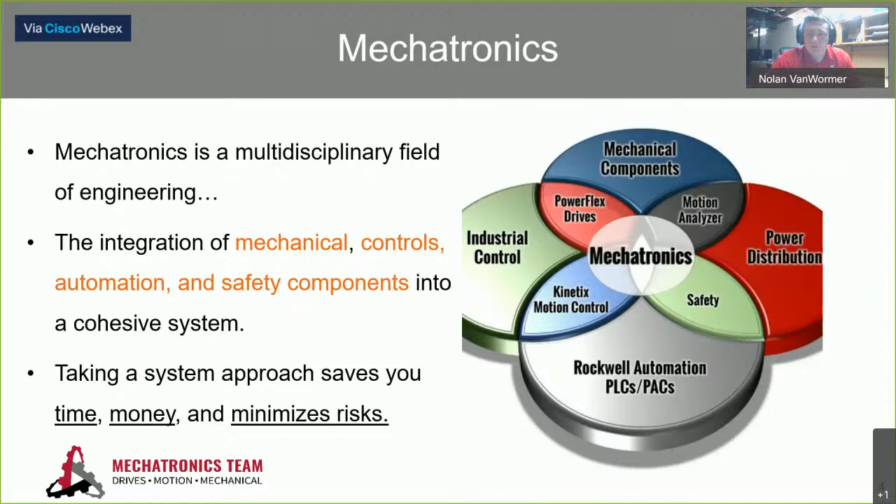So let's get started. So we'll go through what is mechatronics, why to use it, application considerations. We'll go through an example, and then we'll use the Rockwell Automation sizing tool Motion Analyzer to go through a full system. So jump right in. What is mechatronics? You can see on the screen there. Big long word. Basically, it's bringing the mechanical department and the controls department together for the benefit of your machine safety, function, save you time, save you money, and reduce your risk from the machine perspective as well as safety perspective.

So typically what we see is the mechanical department takes their application data, whatever the load is, whatever the cycle time is, starts picking out some mechanical components that look right in the design, that have a good enough safety factor, maybe consider life, maybe not. Pick some gearing to make an inertia match, or maybe not, and pick a motor. And then a few weeks later, once the design comes along, the controls guys get kicked off, they pick out a PLC, some safety components, start designing a panel, and drop a drive in. And then we hope that that drive and that motor work together for a functioning system.

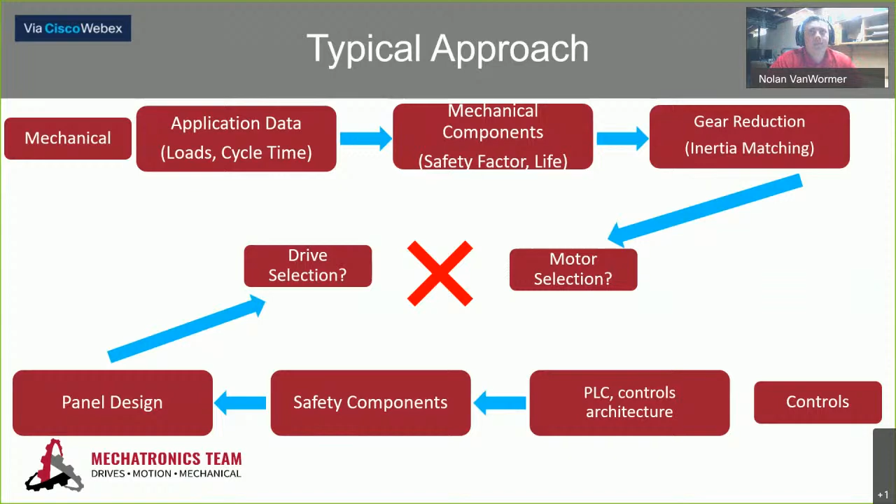So the mechatronics approach takes that a little bit differently, and we get the mechanical team and the controls team together from the start. We look at the application, what's the load, what's the cycle time, how do we optimize that, look at safety factor, look at safety of the system, make sure we have a good inertia match, that we have the latest PLC, the right drive and motor optimized for whatever you're going for. Do you need washdown rated? Do you need safety? Are you trying to reduce costs, reduce weight, whatever it may be? We look at it as a whole system, mechanical and controls together. That's really what mechatronics is all about.

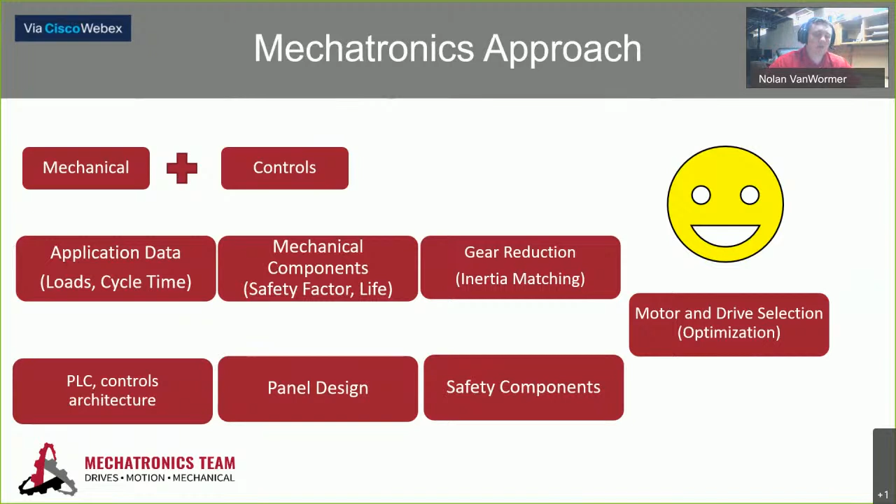So why use it? So with more and more competition for you and your customers going after the same kind of machines, you want to make sure that whatever you're offering has the most features or is the most cost competitive, or whatever it is your selling point. And everyone's trying to build machines faster.

Designs changing after products have been ordered. Something got heavier and you need to make a change to the structure. You need more linear rail or more of some component or different size of something. All things we want to avoid if we can up front, or knowing that when that design change does come, that you can make the change of product easily, know what the limits of your system are.

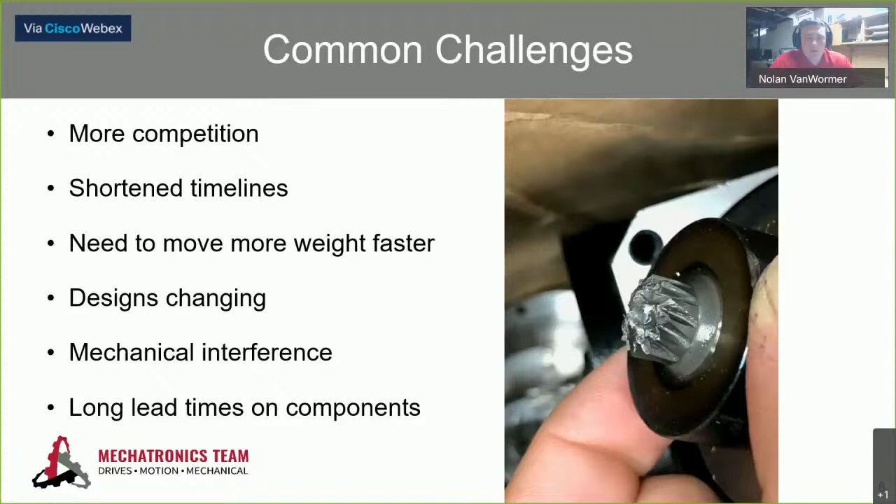And then as things change, sometimes boxes don't fit anymore and you got to make adjustments. And having a system up front where you know what the limits are and how big everything is and what you have to work with makes making those changes a whole lot easier. And especially with everything going on in the world right now, lead times can be all over the place. And with our team, we can look at changing various components, working with our long list of different vendors to get you the right product in the right amount of time.

So some more benefits of Mechatronics, relying on engineering resources at McNaughton-McKay. We have a whole team of people dedicated to looking at the mechanical system and the control system together as one. We can offer CAD models. We know what the system limits are. A little bit later, we'll get into a report we can offer that shows you, based on what you tell us for speeds and loads and your environment, what the speed limits are, what the torque limits are, what you should set in the PLC.

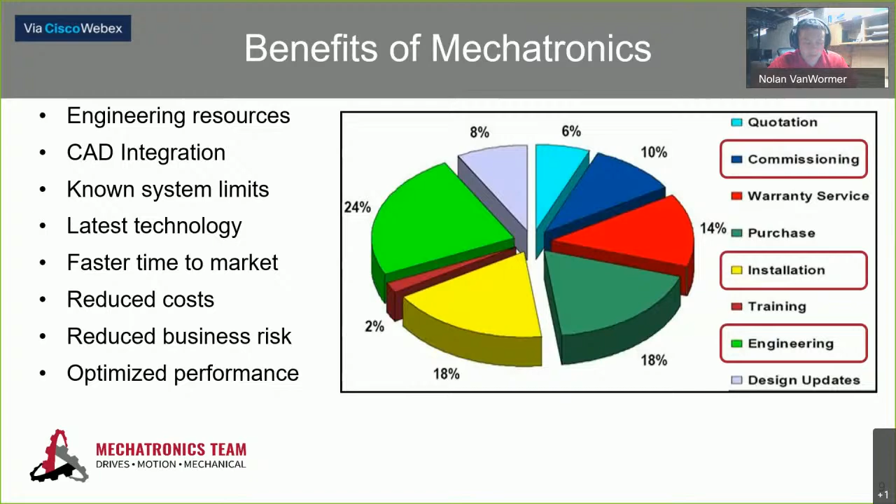We're up on the latest technology to offer you advanced safety features. We can help you get to market faster, speeding up your design, providing you CAD models and recommendations on product. And we can reduce cost by optimizing the system as a whole. And we'll get into an example showing how much cost we can really take out of a system.

So we talked a little bit about optimizing at the beginning. What does optimizing mean? It can really mean a whole bunch of different things. It can be optimized for size. You're limited in some package of something you're trying to replace, or the whole tool needs to be small. It can be optimized for cost. Everyone's always trying to take money out of their job, put more money into your pocket.

Nolan, I think we lost your audio there. Bear with us, folks. I think we've lost our audio. I apologize, everyone. Give me just a second. I'm going to try to reach Nolan. I think our audio has cut out and he's unable to hear me as well. So give us just a second and we'll get back online here. I hear something. Are you back? I'm back now. Okay. Great. I think we missed a few of those bullet points there. So if you can back up just a little bit for us.

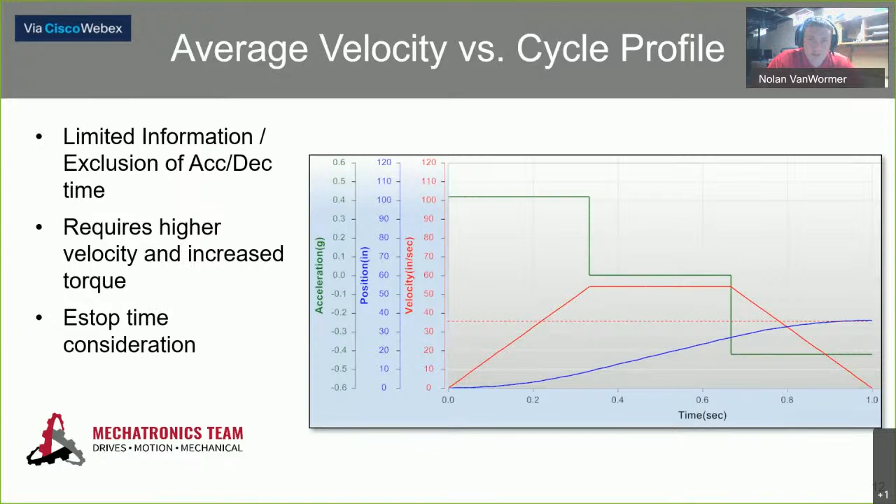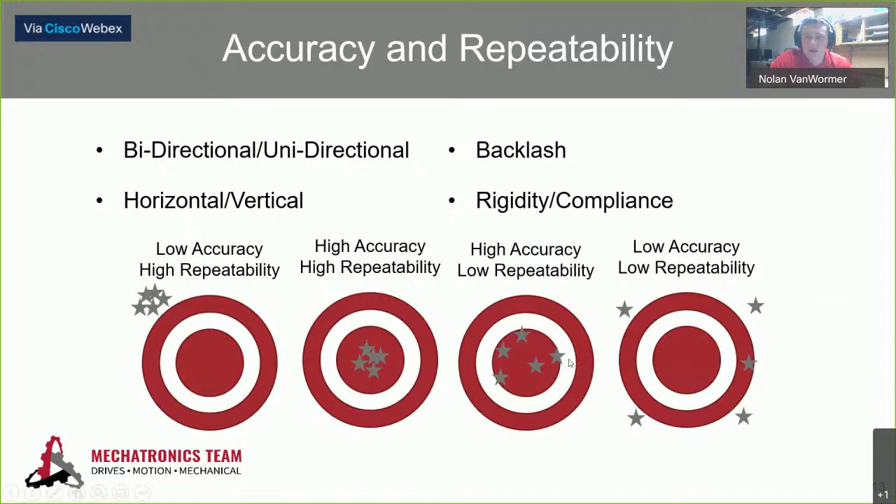Getting to that high accuracy, high repeatability often comes with more costs, whereas a repeatable system that might not be as accurate that you can tune in with your adjustments on the control side can save you some money in your gearbox and other components. And then we have some other applications where I don't need to be terribly accurate or terribly repeatable. We can go with a much lower cost system. So just understanding the difference between accuracy and repeatability goes a long way in optimizing cost and other components.

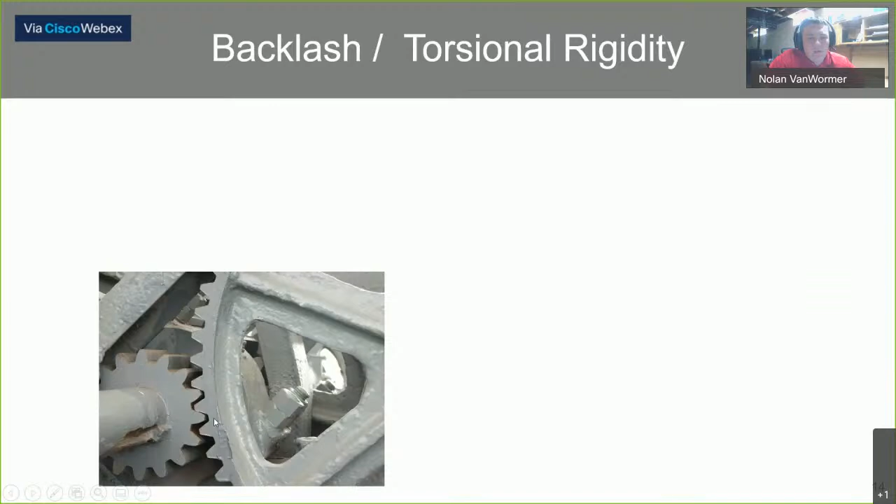So talking about backlash. So you see here, backlash is this gap between these two teeth here, where as you change direction, there's some lost motion. So if we look at a low-cost economy gearbox, it's going to have the backlash shown there. You have a couple arc minutes, and then an elastomer coupling can have a lot of squish within the spider insert. So that can end up being a 1/2 degree at full load of a particular gearbox, which can be quite a bit of motion.

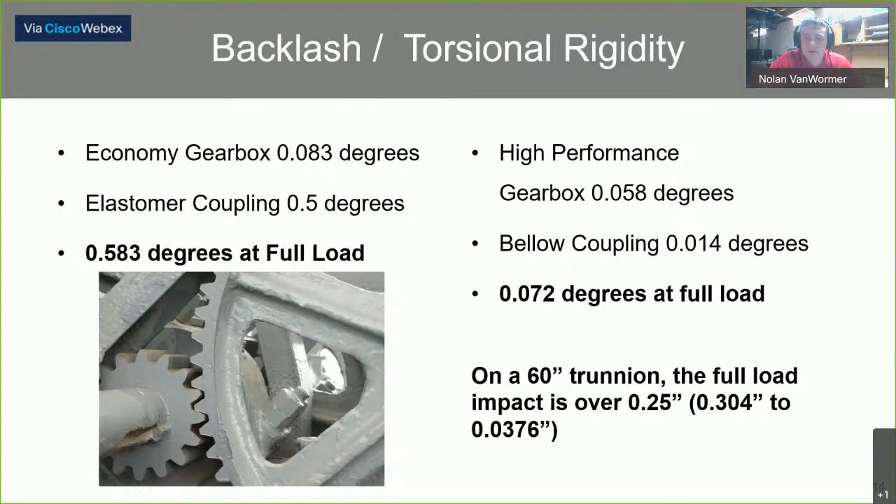So if we want to look at something that's a little more rigid, you get a high performance gearbox that has a bellows coupling, so there's no rubber inside to flex, it's solid metal. We can take that whole 1/2 degree out and we're left with fractions of a degree. And you can end up with a 1/4 inch of lost motion on a 60-inch trunnion at full load, which can be a huge amount of error build up. So if you have trunnions and those types of products, you want to make sure that you're picking out the right gearing that's going to give you optimized performance for your system.

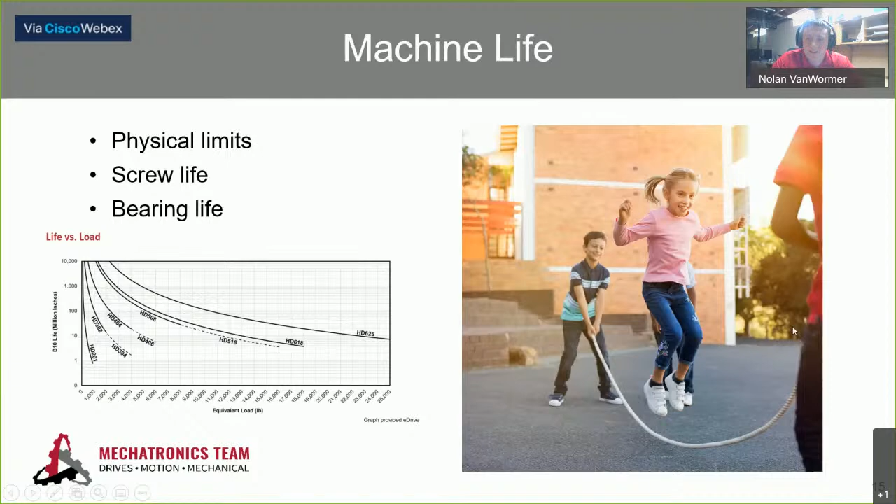So you want to make sure you're aware of what the critical speed is if you're using a screw type product, so you avoid your screw looking like that jump rope and damaging your product. Other things to consider is the efficiency or friction of whatever product you're using.

But on the flip side, if you have a vertical load, a ball screw is much more likely to backdrive under its own load, so your load will drift down. Whereas in a machine screw, you might want that inefficiency. So it's finding that balance of where you need efficiency and where you don't to achieve performance of your machine.

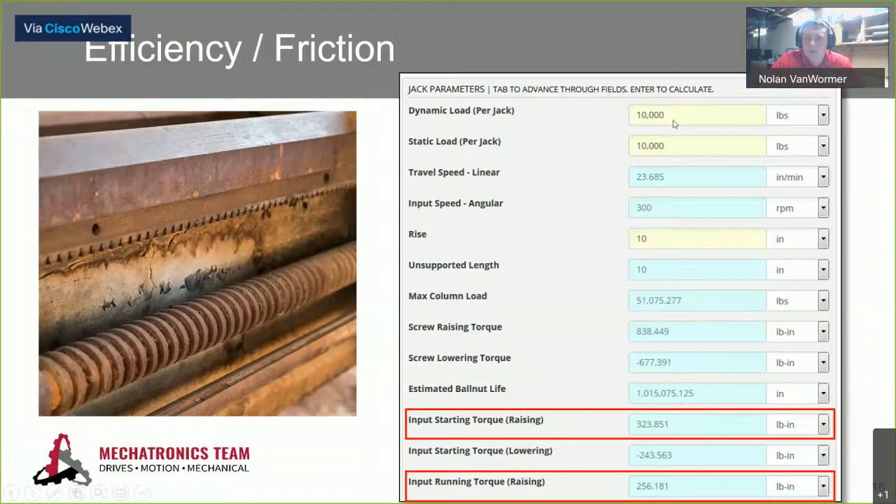So let's take a look at some things we look at and how we collect data. When we do a sizing, our drives motion mechanical team, we look at what the load is, what your move profile is, how often you're cycling, any other specifications for your actuator. Do you want a rod style actuator? Are you looking for a belt? Are you looking for a rack and pinion?

Do you have a similar machine? What type of drive and motor family are you looking for? Do you want the latest and greatest technology? Do you have a huge install base of legacy equipment you want to try and stay within? Is there a safety factor you're looking for? Is it 2 or 3x, or are you doing an aerospace type application, 5x, something critical? So all those things, we collect them within our application data sheet.

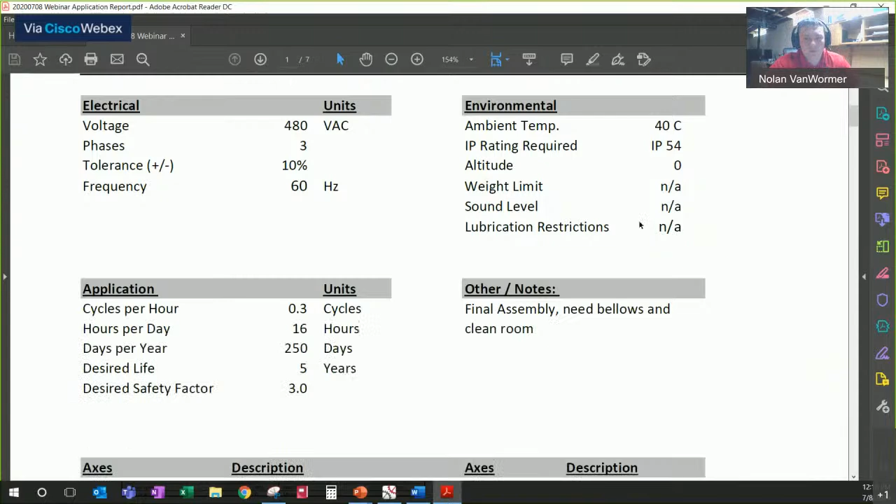And then we have a report, which I can pull up now. So once we collect all that information, we go through all of our sizing. We can provide you a report that looks like this. It's got your information, whoever worked on it, when we worked on it, what your job number is, so you can put it within your job file. We tell you what voltages we assumed, what environment we're assuming. We have all the application data for life. We have spots for notes there for you.

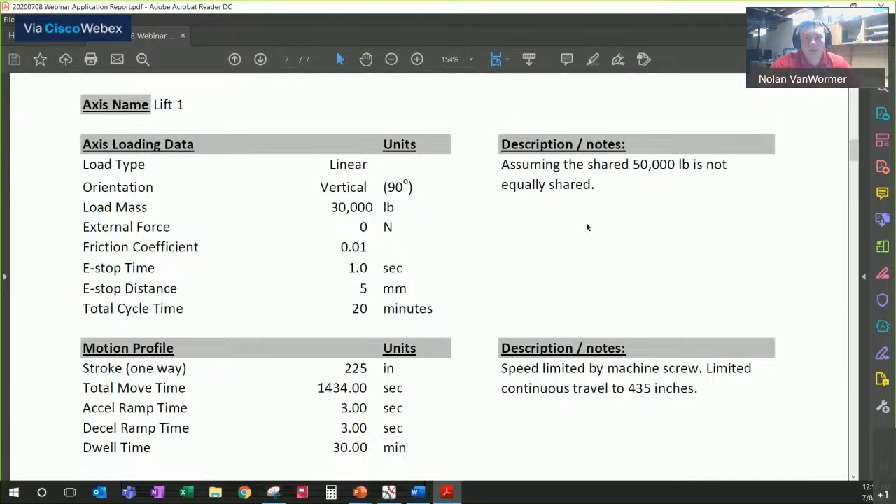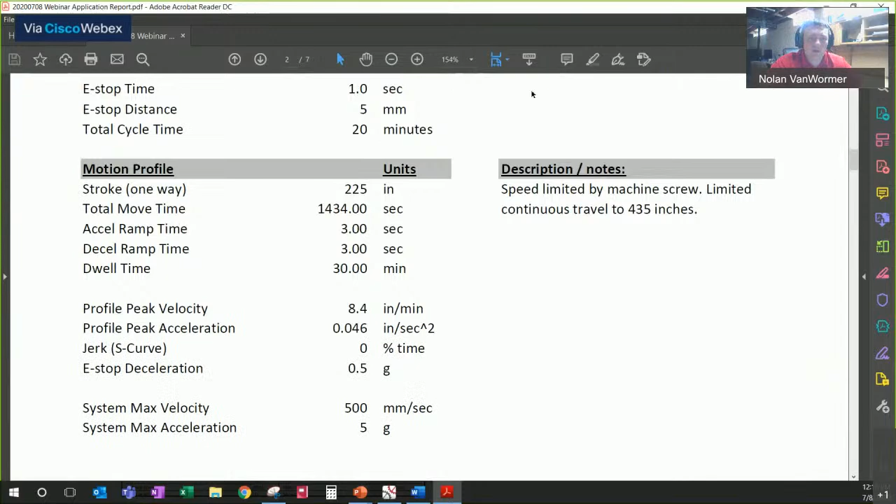And for each individual axis, we have all the notes of what load we sized to, what e-stop time we allowed for, what the total cycle time is, some notes on what the motion profile is, and show you a little picture of what we get out of the sizing software. You know what repeatability and accuracy you should be expecting.

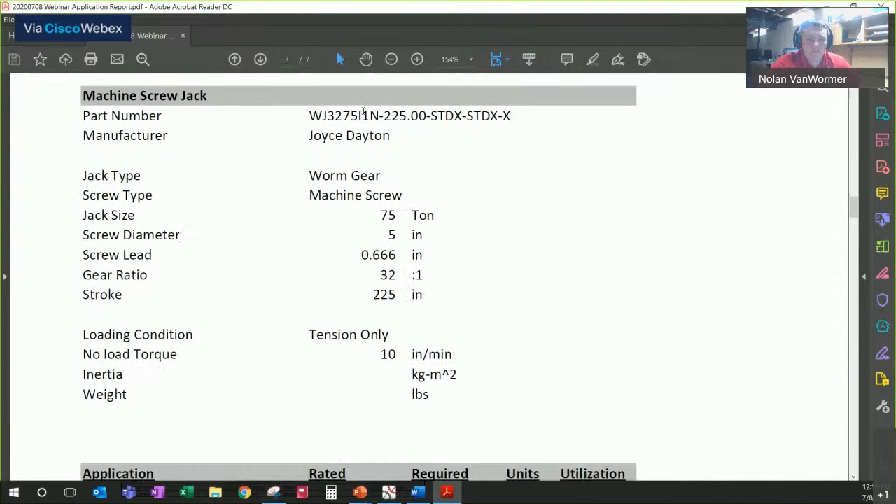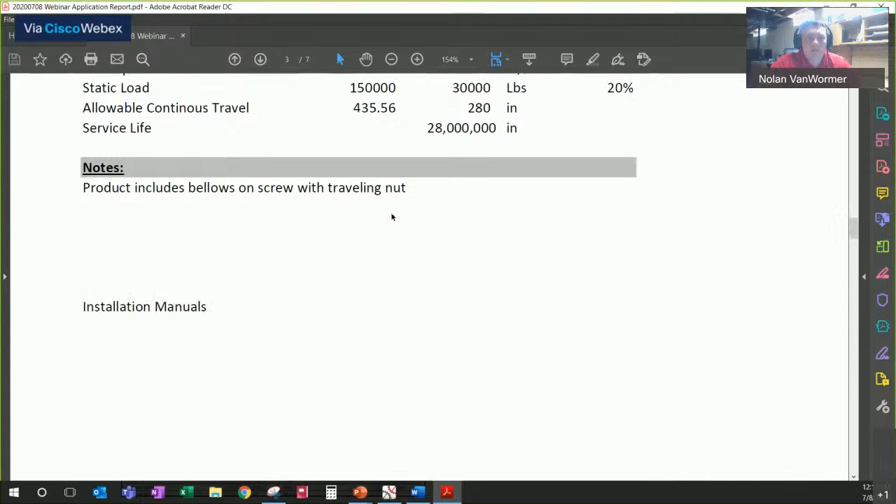And then we'll give you all the information on the products that we help select, how it's loaded, what it's rated for, give you a utilization percentage to know how oversized it is, if you need to speed things up. If there's installation manuals available, we'll attach those in the report here, give you maintenance manuals so you know how often to lubricate and how to take care of your machine.

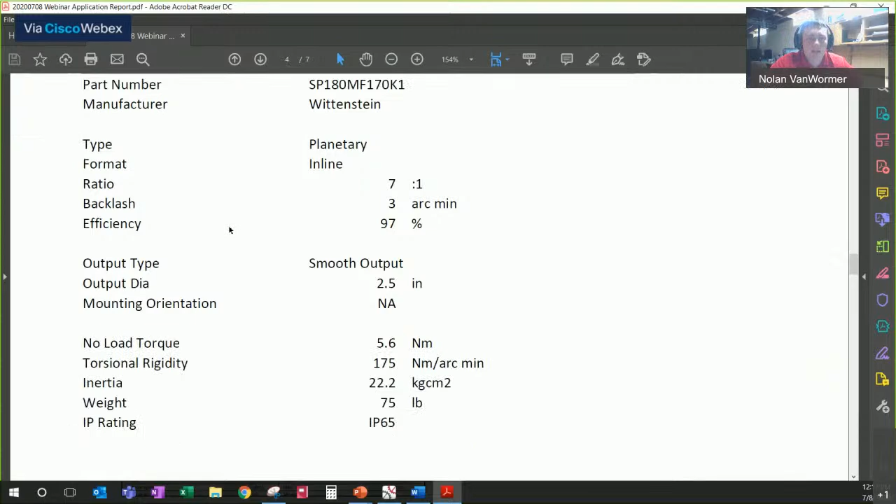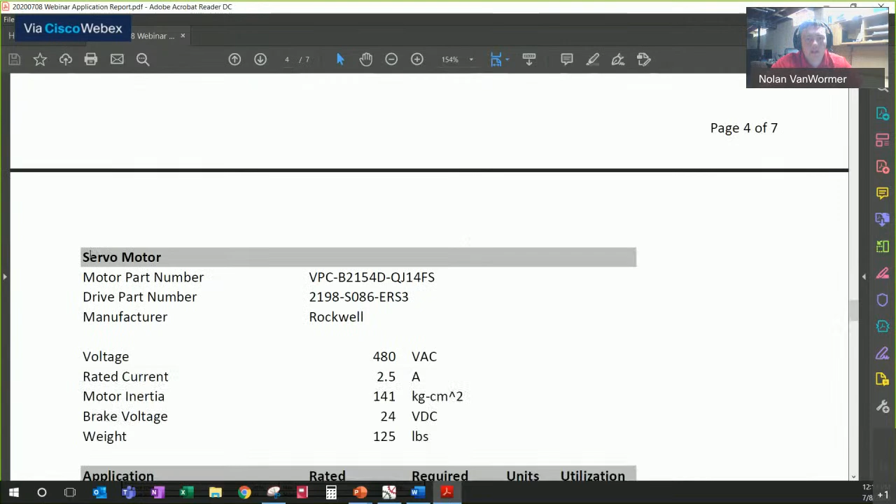Same thing there for a gearbox, how much of the speed are we using, how much of the torque are we using, notes that this particular gearbox is lubed for life, give you information on the Rockwell motor we select for your particular application, what it's rated for, how much it weighs. Other important notes like the VPC motor has a 230 volt fan that you're going to need to plan for.

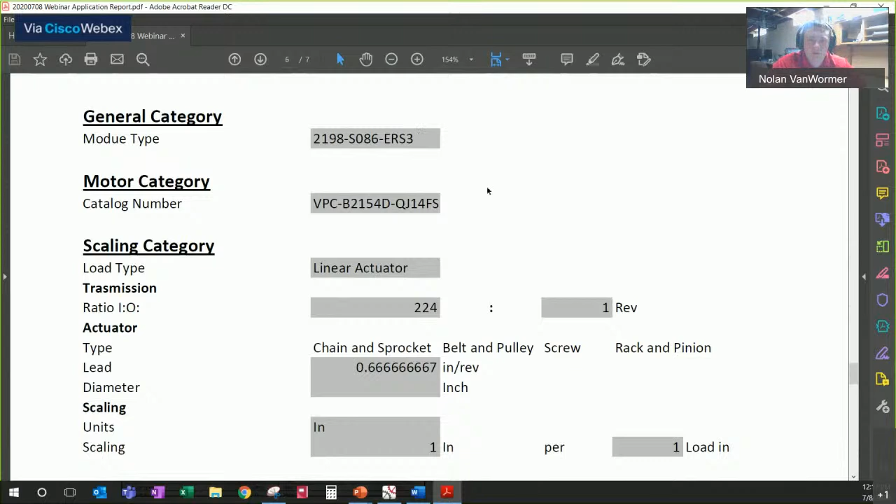And then to help out the controls folks that are on the call, once you get to the programming side of things, it'd be really helpful if you knew what the mechanical team picked out and how that impacts your controls. So we set up a chart here that'll walk you through your motion axis configuration. You put in your drive, your motor, here's all the scaling information. So there's no guessing or having to go ask, go look it up. It'll be right there for you.

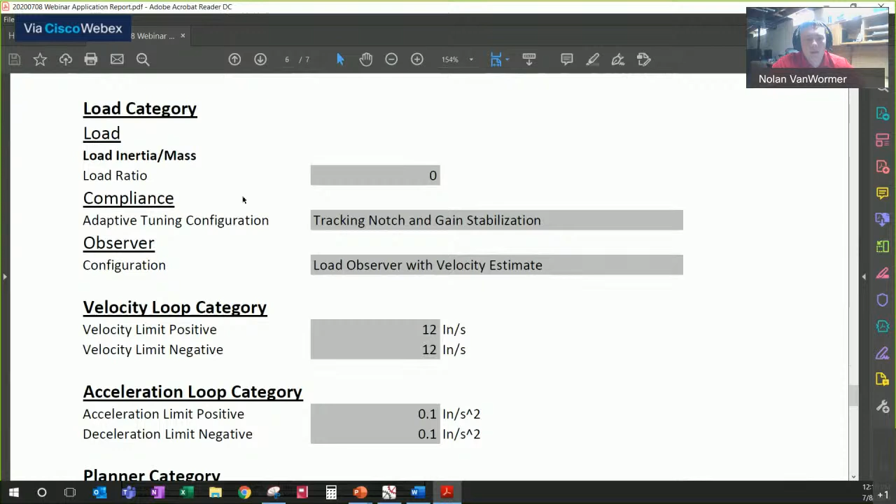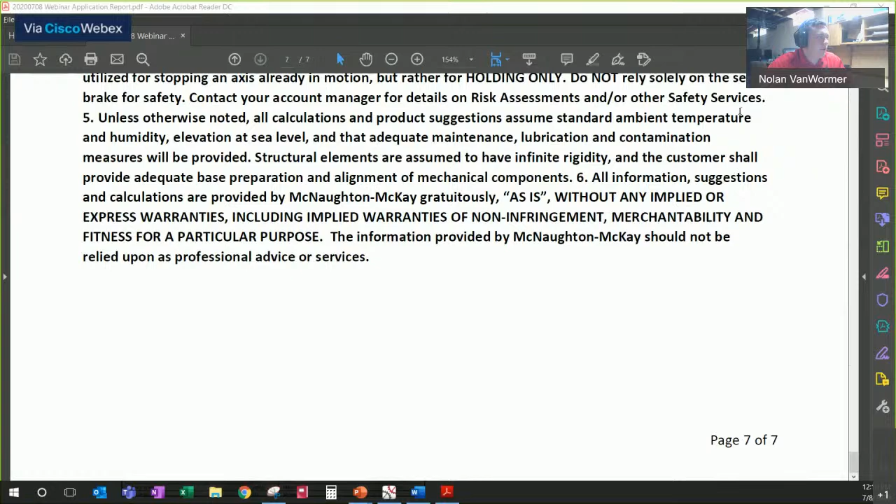How to set up auto tuning, all your loops, position limits, acceleration limits, velocity limits, all those things. And then our legal disclaimer there at the end. So we'll jump back into the PowerPoint here. So that's kind of our process. We collect all that data from you and then report back what we sized to and what everything looks like.

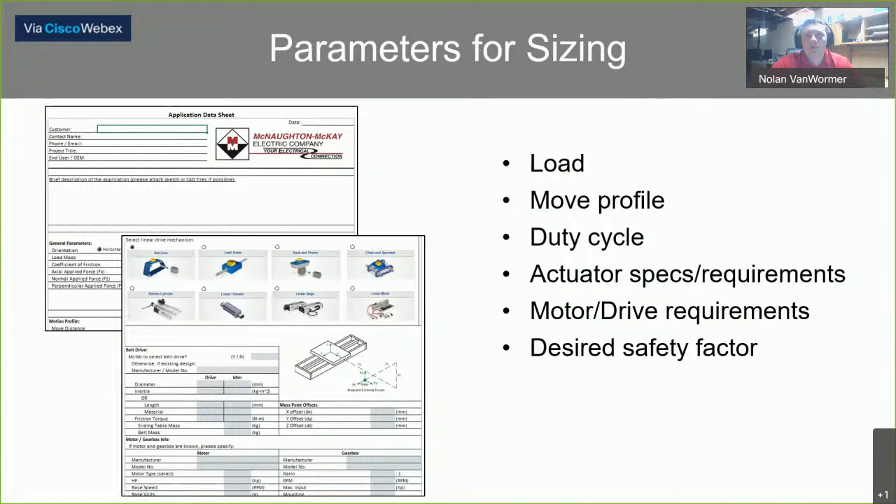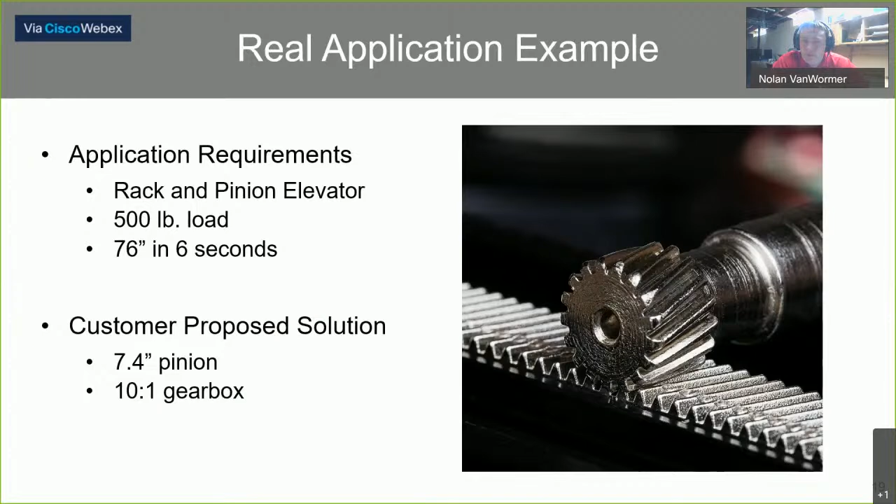So what does that look like for a system that we've done for a customer? A while back, I did this application. We had an elevator. It was a dual rack and pinion drive. We were lifting 500 pounds, 76 inches in 6 seconds. The customer already had designed in a 10-to-1 gearbox and a 7.4-inch pinion. So we went through, did a sizing, and then I asked, do you mind if I play around with that ratio and that pinion a little bit to try and optimize the system?

We'll take a look at what the customer originally came up with. So we ended up with a 165 millimeter frame VPL motor with the biggest Kinetix 5500 drive available. And that gearbox that they had picked out, at 10-to-1, we were actually exceeding the RMS torque. So the continuous torque of that gearbox, we were exceeding based on the duty cycle they were running.

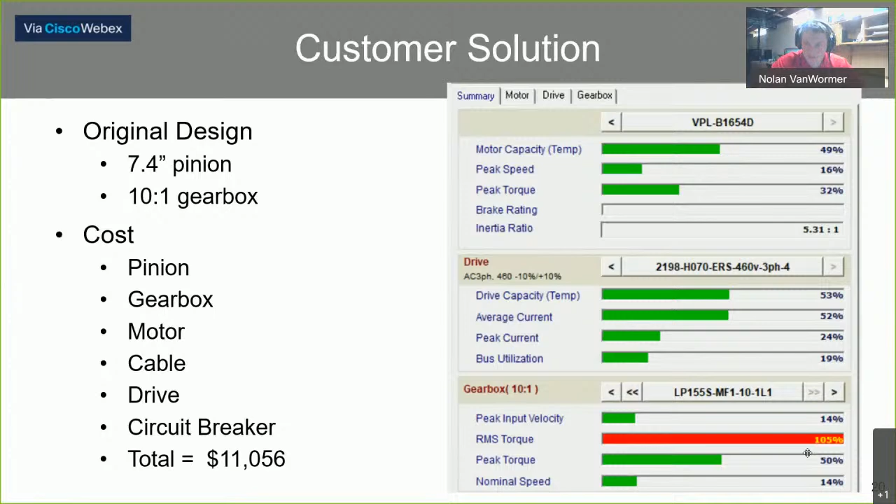Look at that total system add up, because we're looking at the whole system. It's more than just the motor and gearbox. It's motor, gearbox, drive, motor cables, circuit breakers, everything that goes in the panel. Total cost, looking at about 11 grand for that solution. So if we optimize it and we go to a smaller pinion and put more ratio into the gearbox, we're able to get that system down to about $7,000, taking 37% of the cost out.

We end up with a better inertia ratio match. You'll have an easier time tuning the system. It'll be more responsive. It'll perform better. We were able to drop down to a 100 millimeter frame. That's dropping 3 motor sizes. We dropped 2 or 3 drive sizes. The gearbox actually did get smaller because we need less torque with a smaller pinion. So the whole system becomes more efficient from a power usage perspective, as well as we're not overloading any one component. So the system overall performs better and costs less.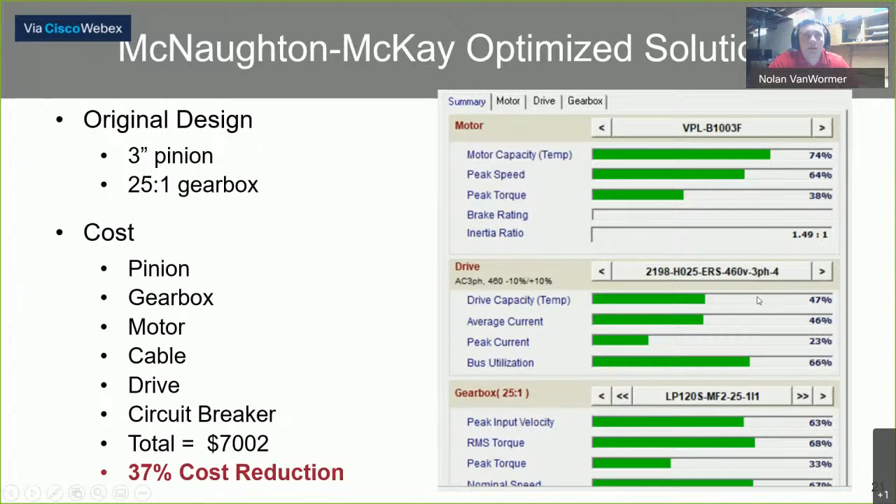So now we'll jump into what a Motion Analyzer system looks like, which is where this screenshot came from here. So some of the features before we get right into the software. You have a lot of flexibility in units. So if your mass you have in pounds, but your stroke's in millimeters, software doesn't care. There's drop downs for all that stuff. We can size VFDs or we can size servos. The profile you import, you can actually export to the PLC. So if you have a complicated move profile, you can export that as a CAM table and import it right into the PLC.

You see performance of each of your components, not just the Rockwell components, but also some of the Encompass partner products. We can look at what your energy consumption is to be able to compare different solutions for total power draw, so what it's going to cost in the long term for the end user. You can play with different gear ratios and a lot of different things to try and optimize the system for you. So let's take a look at a sample application here.

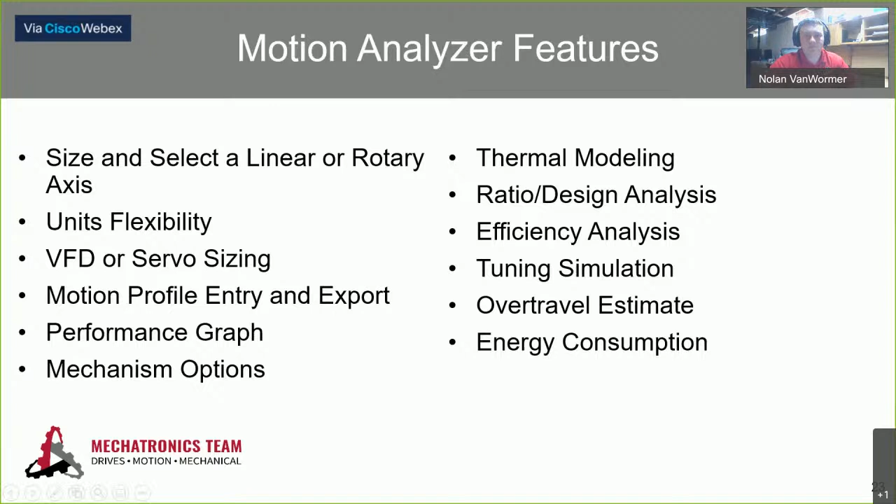So we'll take a 500-pound load. We're going to move it 24 inches in 3 seconds. We're going to do horizontal. And so we're going to put it on some profile rails. And we're going to press and hold 2,500 pounds for 10 seconds. We'll retract in 3 seconds and dwell for 5. Really want to make sure it's as small as possible and as cost effective as we can get. So we'll probably go with a screw type actuator for something like that. Keep the package small.

So you first launch your Motion Analyzer software here. We'll go in, we're going to size and select rather than just looking for pricing on something where you want to put a bill of material together. So we said we're going to go with a linear load. So we'll pick the linear load tab there. We'll go ahead and put in our load mass in pounds. We had 500 pounds. And important thing to note, a positive force opposes positive motion. We see that in our picture here. We'll be a little conservative with our linear rails and say we have a 0.1 coefficient of friction on that horizontal surface.

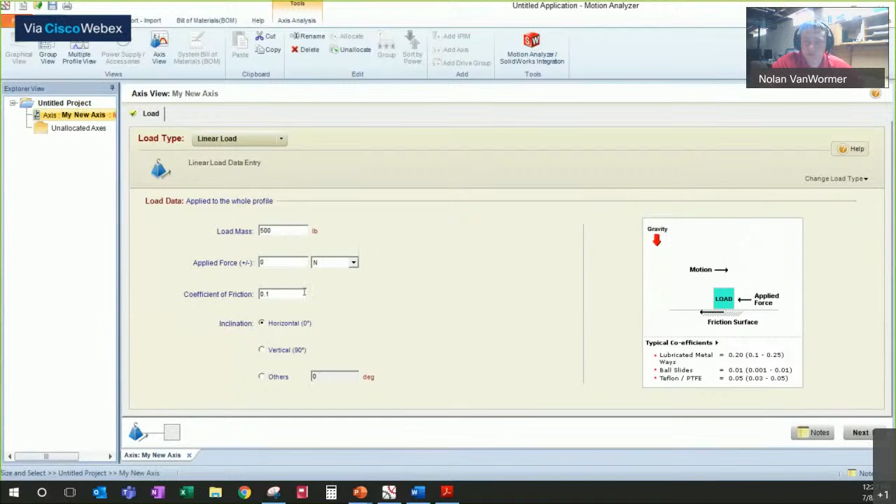So then we're not going to put our applied force in here because it's not always on the load. We'll add that in our motion profile because it's only on certain parts of the segments. If you just have a basic, I need to make one trapezoidal move and then dwell, you can use this. Otherwise, we'll click more options to give you a more extensive profile editor. We'll go ahead and delete that, and we will add an index here. So we're going to move 24 inches in 3 seconds.

Okay, and then once we get there, we have a couple options. We can leave it as a typical 1/3 trapezoidal move with a 1 second accel. If we want to change that, we can change to a trapezoidal move. And then we have control over our accel rate. If we want to take a longer accel or we want to bring it down to somewhere in the 1/2 second accel range, we can take a look at that. And then we'll add a dwell. So this is where we're going to hold for 10 seconds. We'll press and hold for 10. And here's where we're going to put in our 2,500 pounds of force.

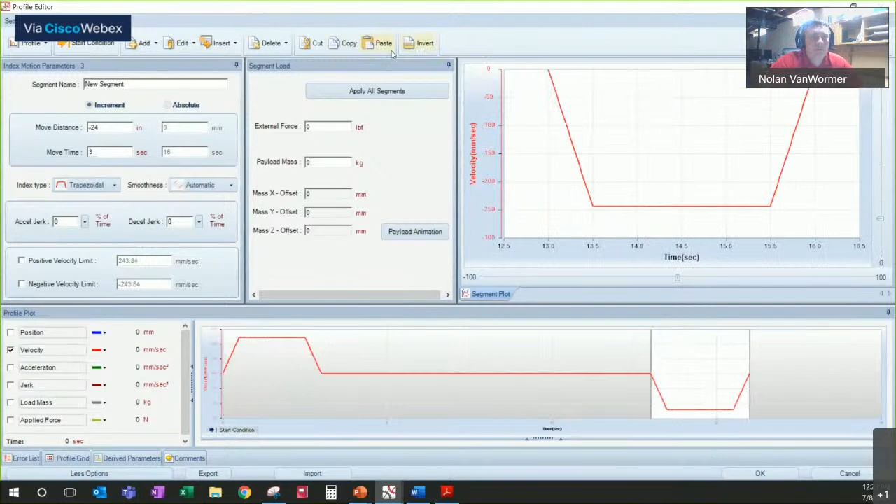And then we need to retract. So we'll add an index. And we can actually copy this one. Go back to that one we just added, paste it, and flip it. So now we've retracted, and we said we had a 5-second dwell. So we'll put in our 5-second dwell.

And you can see what the position graph looks like. We went up, we cruised, and we came back down, and we're waiting in our retract position. You can look at the acceleration graph. So if in our graph we want to add some S-curve to make our whole move look a little smoother, maybe get rid of some of the jitter in the extended and retracted positions as we're coming into final position, we can put something like a 30% accel jerk, and you see that ramps our acceleration up and down.

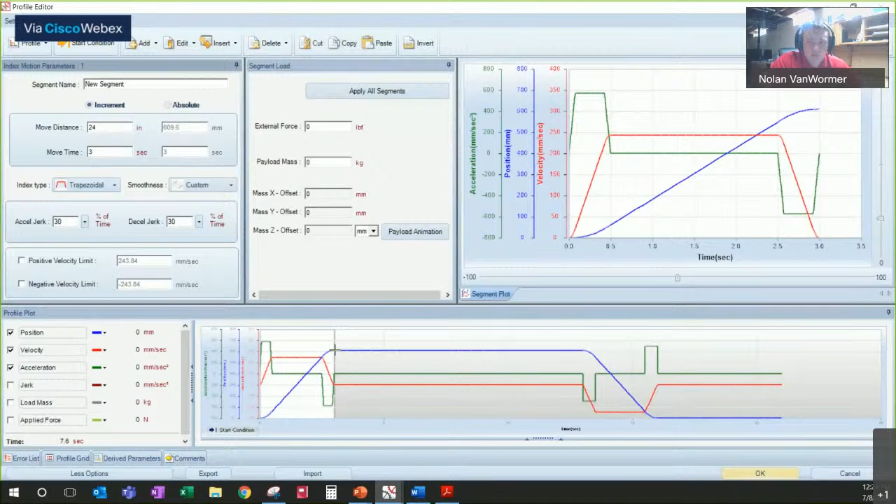So when you're first starting and you're breaking away all that stiction, you're actually ramping your acceleration up. Makes it a whole lot easier on the mechanics, and we'll do the same thing on our way down. So we see here, we are ramping the acceleration up, and we're ramping the decel up and down. So we'll leave one S-curve, and we'll leave one without. So that's what our profile looks like.

So we'll move over into picking out our mechanism. So we said we're going to go with a ball screw style actuator. So we'll start with... went ahead and pulled some specs from one of our vendors. So our lead is going to be a 1/2-inch lead on this. I already have the inertia here. It's in pound inches squared. Go ahead and grab that. And we're going to assume a total efficiency of 90% for that particular actuator.

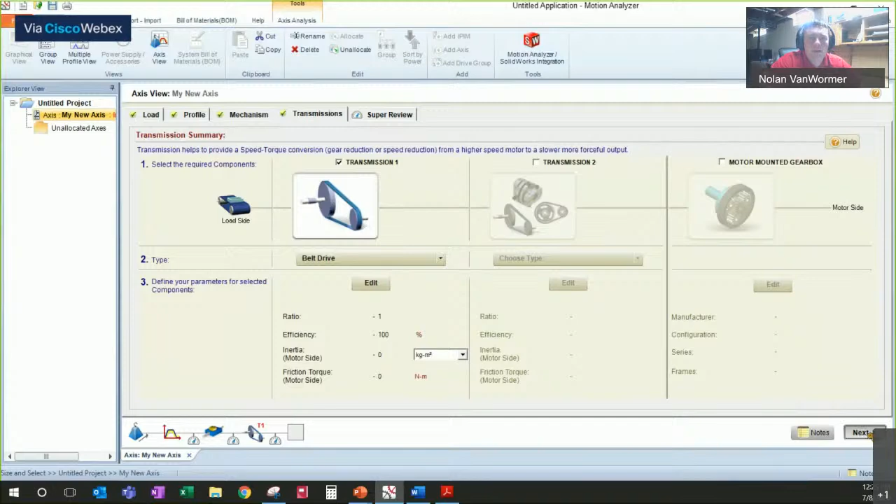Then once we have that selected, this particular actuator, because we are worried about overall length, we're going to use a reverse parallel option. We put all of our inertia already in the mechanism, so we don't need to add it in here. We'll go ahead and jump along here. We're going to use our new VPL motors with their single cable feedback. And with that, we're going to use the Kinetix 5500 drive. This is a 480 volt system. And then we'll let the software do the work from there. It goes through and does a little search.

All right. So within our one-to-one kind of solution, we see we're only using about 1200 RPM of this particular application. And within the biggest frame size VPL, we're limited. We're using quite a bit of the continuous torque. We should probably upsize that drive a little bit, reduce some of that. So that motor's getting pretty hot out there with the duty cycle we're running. So because we're only using 1200 RPM, I see that as an opportunity to change that belt ratio to a 2-to-1, stretch that speed range out here to around 2400 RPM, and we can probably use a smaller motor if we do that. So let's go back into our transmissions tab.

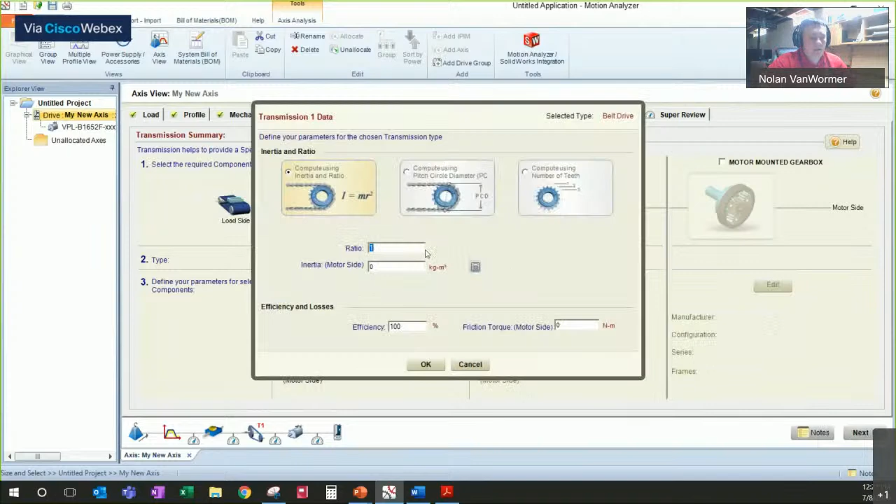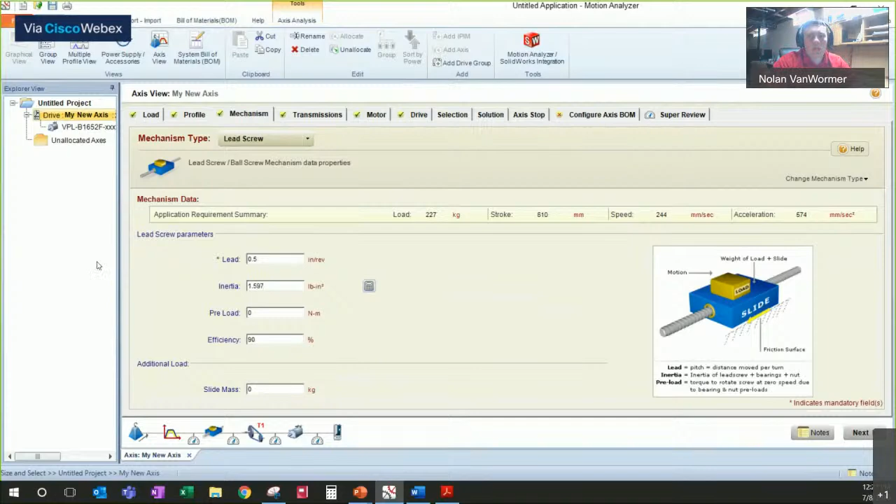We'll edit this, and we'll change that to a 2-to-1. Again, we don't need to play with the efficiency or the inertia there. We accounted for all that on the screw side. But in going to the 2-to-1, we are going to go back to our inertia. The 2-to-1 has a different inertia. We'll make that update there. And then we can go back to our selection and search again. So we had a 165 frame motor there with the biggest size drive. If we do another search again, we can come up with some smaller motors here.

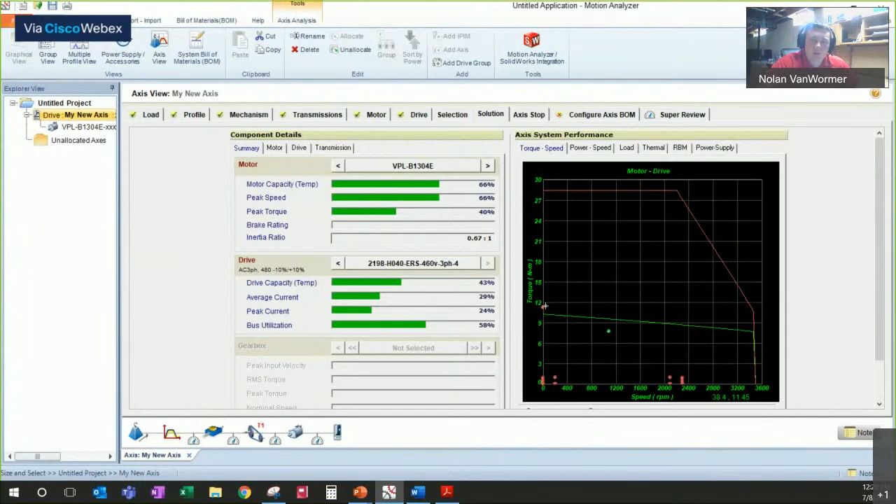Let's take a look at this one here. See how that looks. So it wants us to use a little drive there. The catalog is going to recommend an H040 drive for that particular motor. So we're able to drop a motor frame size, reduce our temperature of that motor. We're only using 2/3 of it instead of upwards of 80%, up near that 2400 RPM range. So taking advantage of the speed range of the servo instead of just being up near the peak torque, we're going to extend that speed range out and use some mechanical advantage of the actuator to lower our torque needed.

And then we can go into configuring our axis. We can tell what kind of encoder we want, build out a full part number. We want a multi-turn encoder. We'll go with a keyed shaft. We don't need the shaft seal kit or anything like that. We'll go with a network safety drive.

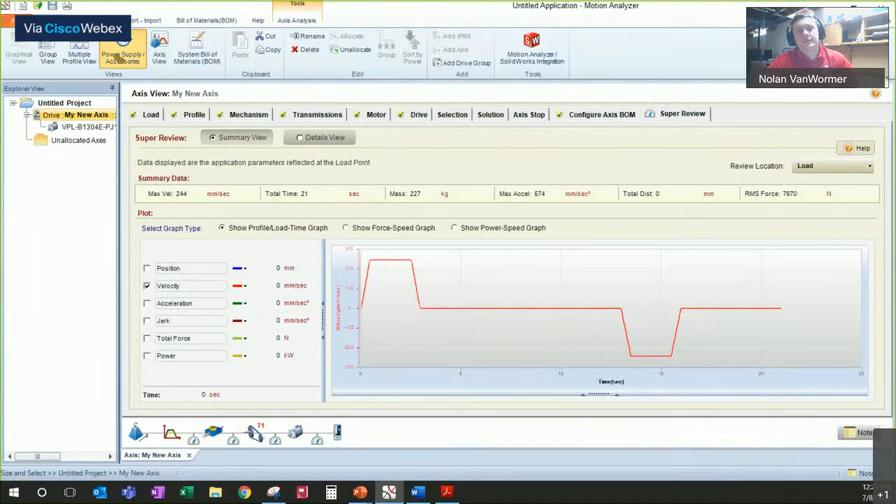Pick a motor or cable that's... put a 10-meter cable on there. Once that's all configured, we can go into our power supply and make sure we're not going to regen too much energy or anything like that.

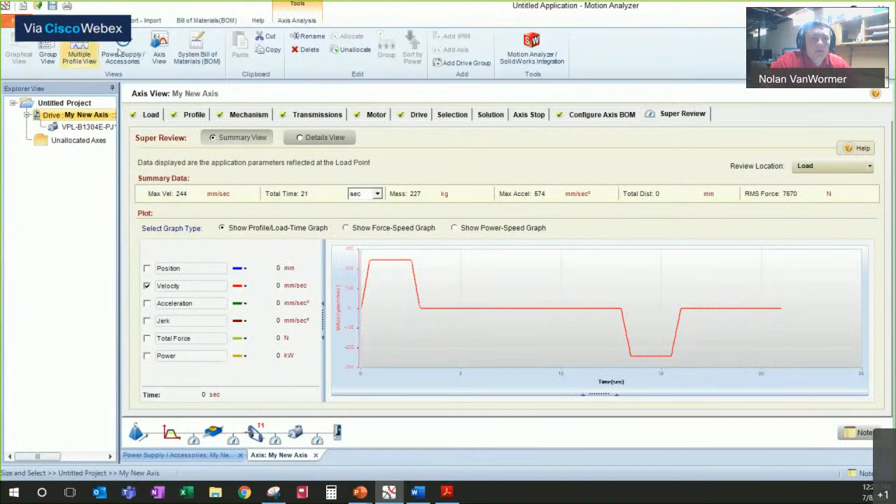Being that we only had 500 pounds, most of our power went into pushing the load, not regenning when we were decelling. But if you were to have that, you can do a shunt search and evaluate if you need a shunt, saying that our internal shunt can totally handle whatever we're throwing at it.

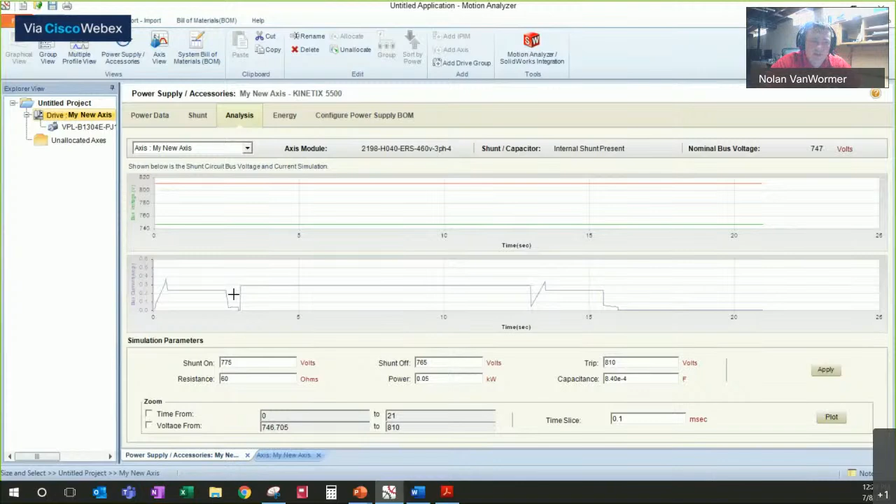This is where we can see where our voltage is rising and falling as we're running. This isn't a terribly demanding application. It's mostly in that press and hold where we're not using a lot of speed. So we can see the energy you can put in, how much current you're using, what electricity costs in your area, how often you're running to get your total cost.

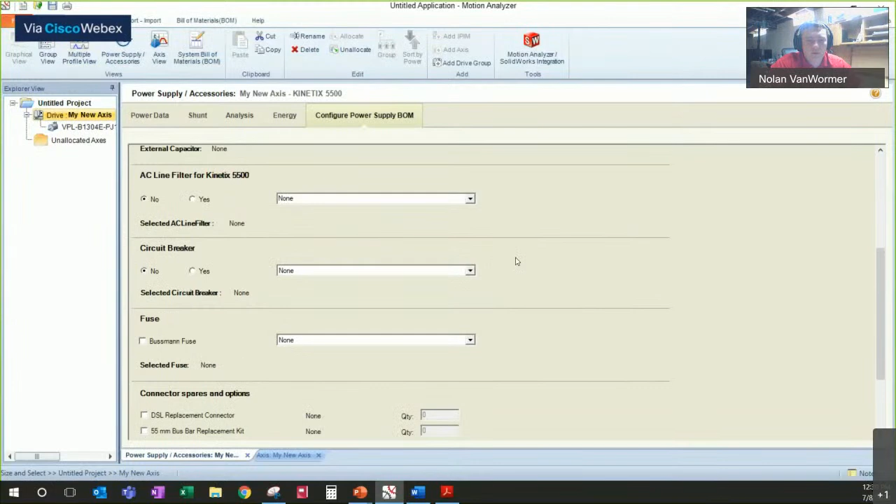And we can configure our power supply. If we have multiple axes, we can chain them all together and pick out all of the connectors we need, all the line filters, circuit breakers, anything like that. So if we wanted to do that, we would add a power sharing drives group, and then we'll drag this axis down in there. We can actually just duplicate this axis. So we'll copy it and paste it into here.

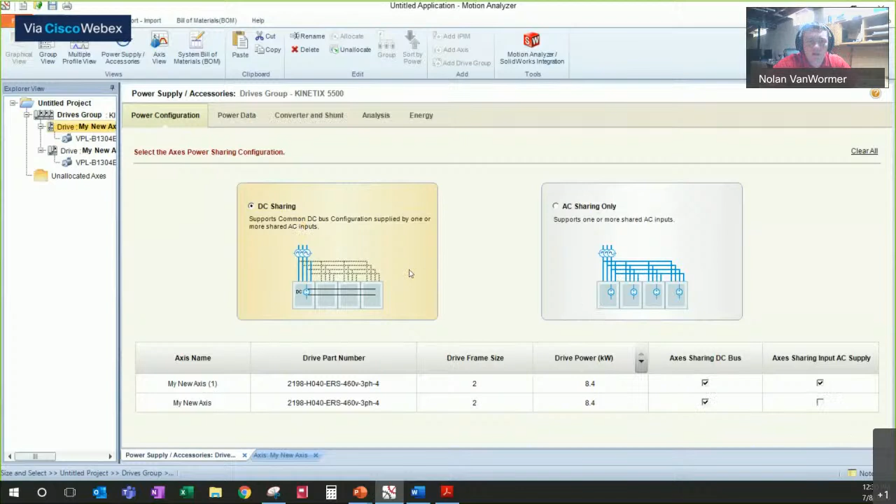So now we have two axes within this, and we get the option for, are we AC sharing or DC sharing? Given that it was a pretty low power application, we could probably get away with one drive powering the whole system. We'll just bring AC into the first drive, and we'll share DC across the rest of them. So we see that probably will be good.

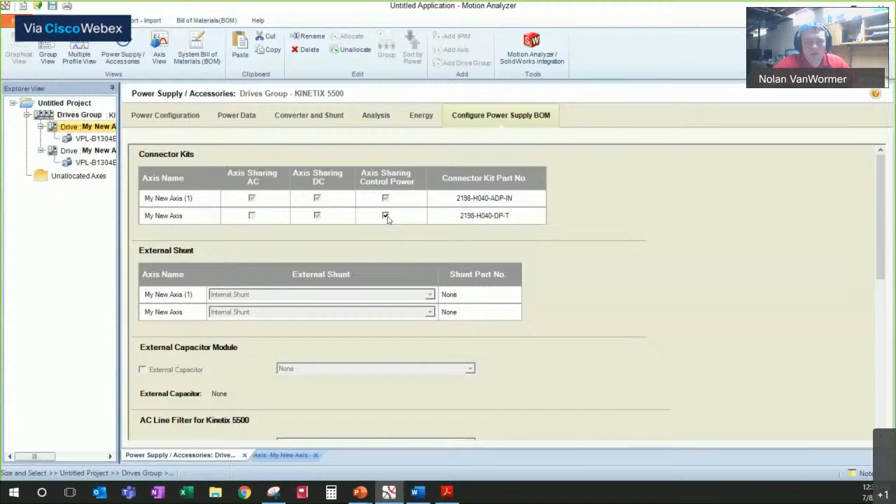So then we can do a search here. We'll calculate the utilization and see that the converter section of that first drive can more than handle the power supply for all of it. We don't need to add a capacitor module or anything like that. Then we can configure our bill of materials. We want to share control power with both drives, so we'll add that in there. We'll add the line filter. We'll add a circuit breaker

instead of a fuse. Then once we have all that put together, we can go into our bill of material, and we see all of our connectors. We see our motors and cables for each of those and all the drives. So that is what Motion Analyzer desktop tool looks like.

So this is a tool free to download from the Rockwell website. It is no longer updated, so you're limited to the VPL series, and the Kinetix 5500 is the latest product. If you need to use the VPC motors or the 5700 drives, Rockwell does have a web-based tool, Motion Analyzer Online, for you to create an account there.

Some of the benefits of using that tool is we can collaborate on a system. So if you start a project on your own and you want to share it with one of your McNaughton-McKay systems engineers, we're happy to take a look at a system that you started, or we can complete the project for you and share it with you so you can see how we did things, what it's sized for, all within the software.

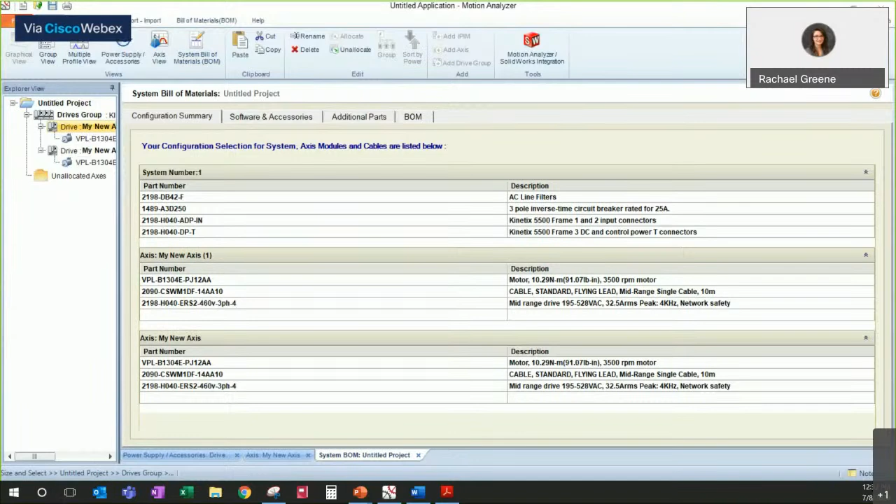Rachel, did we have any questions come up during my presentation? We do not have any live questions at this time. Okay. Well, let me switch back to the PowerPoint then.

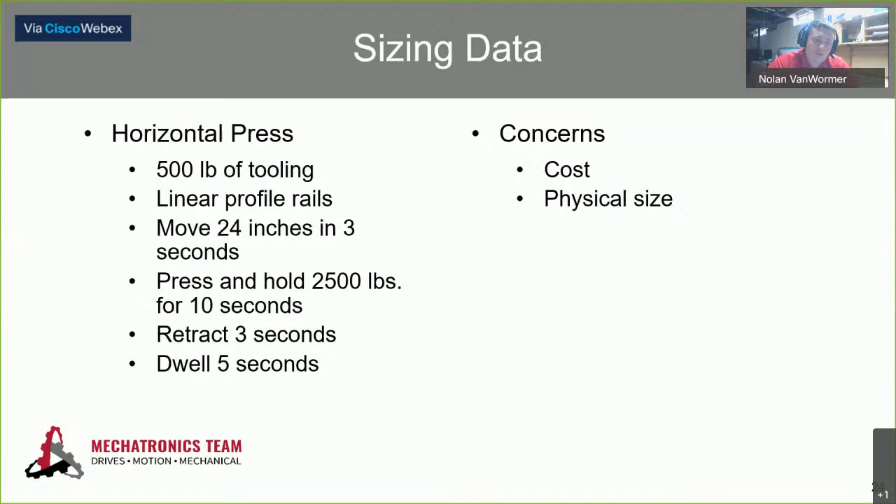So that's what we came up with. Within that particular axis, you'll see we were able to, by really taking a full system approach, reduce the size of the motor, reduce the size of the drive, which is going to save some money on the whole bill of material side, as well as benefit the end user.